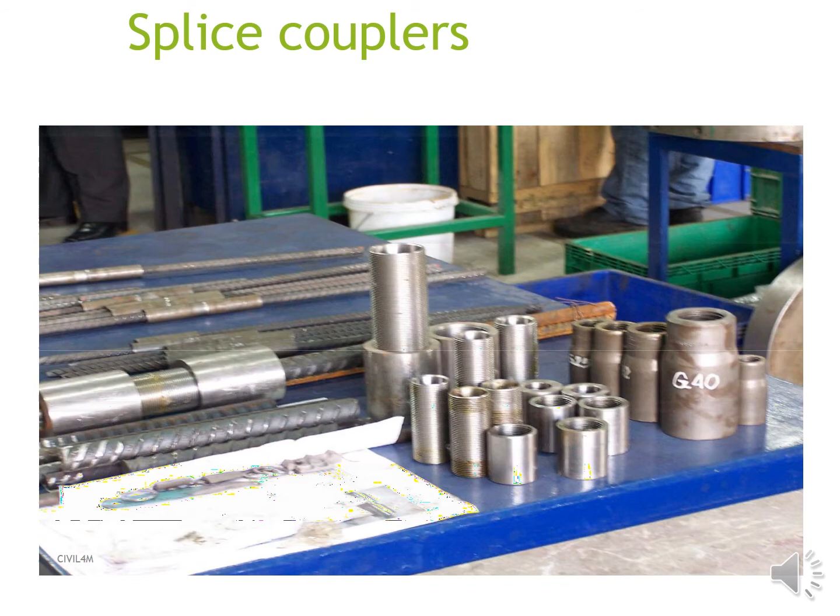Splice couplers. This is the splice coupler generally used for a higher diameter of bars.

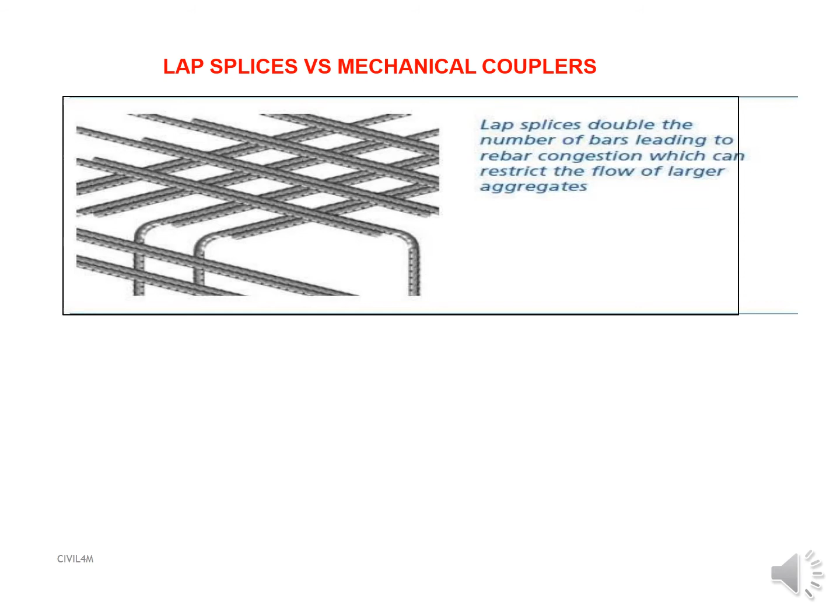Lap splices versus mechanical couplers. Lap splices double the number of bars, leading to rebar congestion, which can restrict the flow of larger aggregates. This is what I mean by lap splicers. Mechanical couplers reduce rebar congestion and improve concrete consolidation. So when I put a coupler over here, the number of bars will get reduced, giving more space for the aggregate.

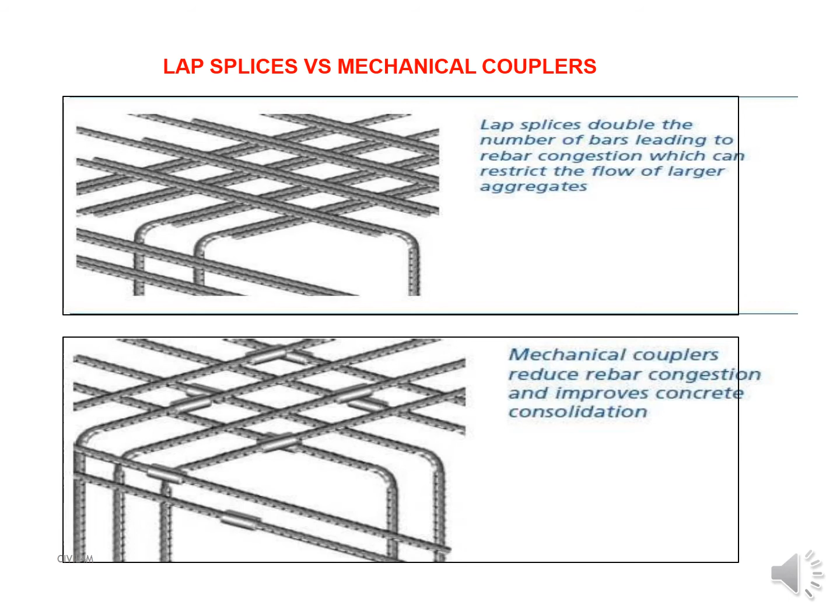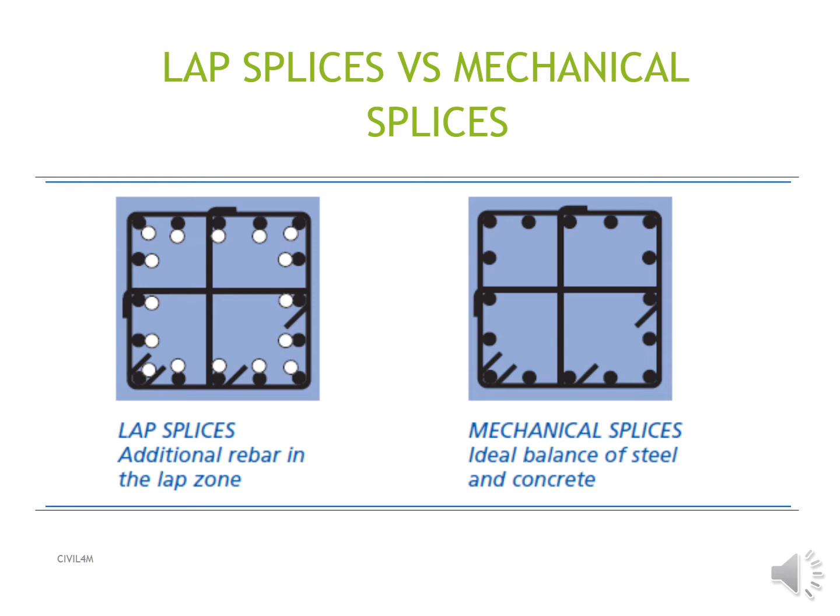Lap splices versus mechanical splices. Lap splicers have additional rebar in the lap zone, as you can see in these images. When you use mechanical splicers, there is an ideal balance of steel and concrete which reduces congestion at the joint.

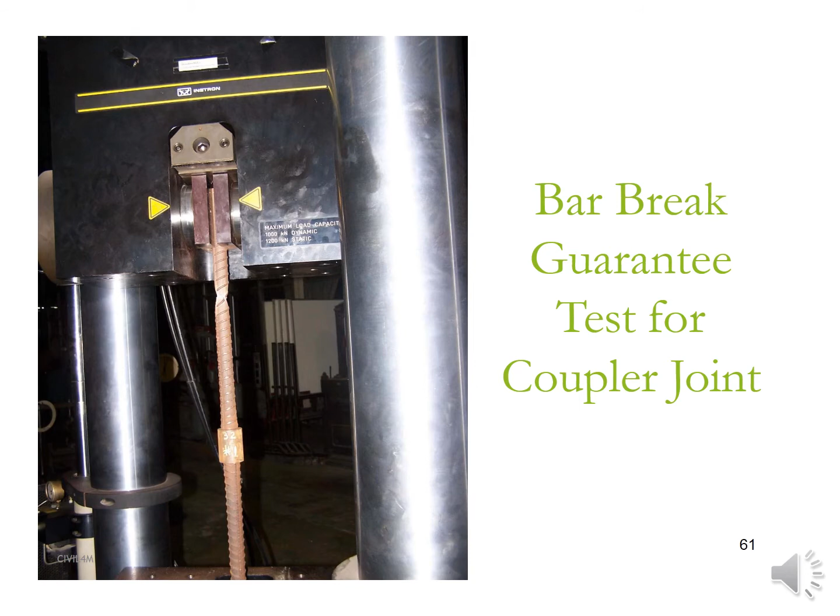Bar break guarantee test for a coupler joint. This is the methodology which you can see in a laboratory, how to do the bar break methodology of the joint.

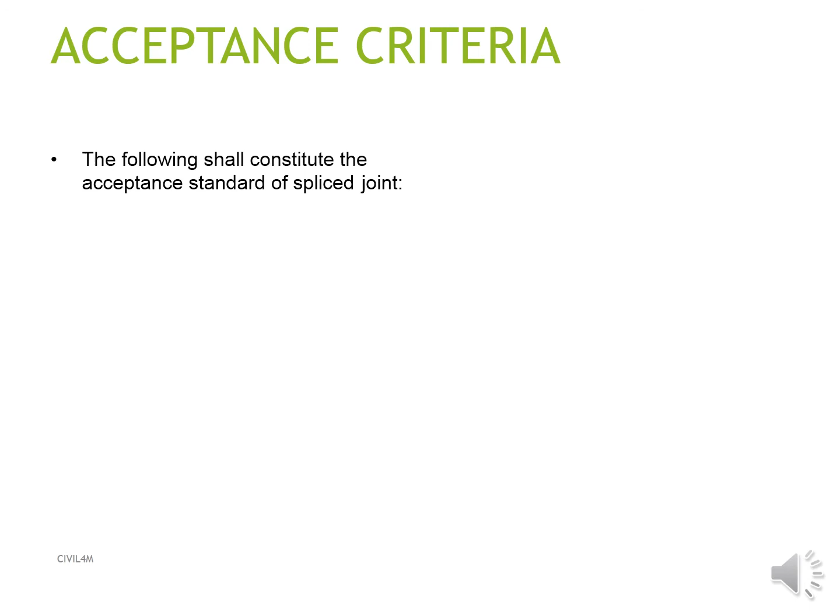Acceptance criteria. The following shall constitute the acceptance standard of the splice joint. The tensile strength of the splice joint shall be more than the rebars of Fe415. The spliced Bartech coupler joint should not fail in tension.

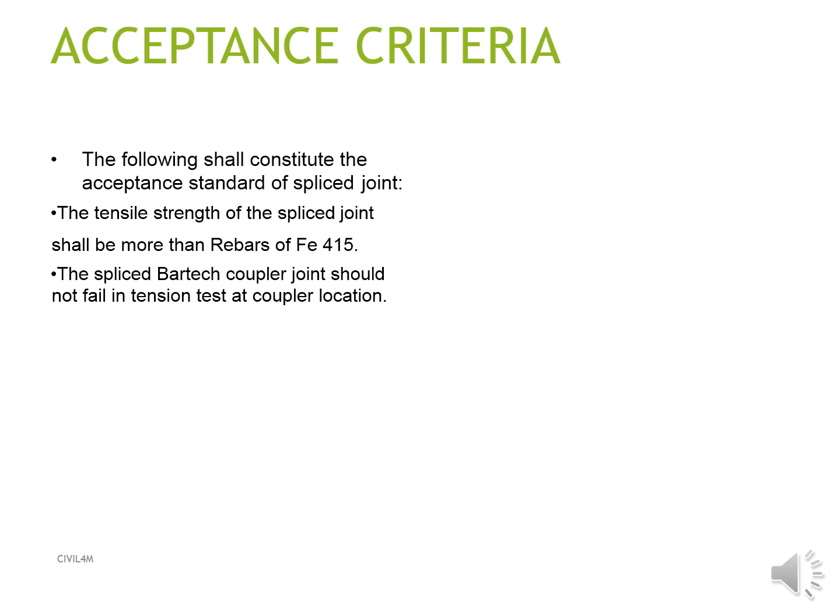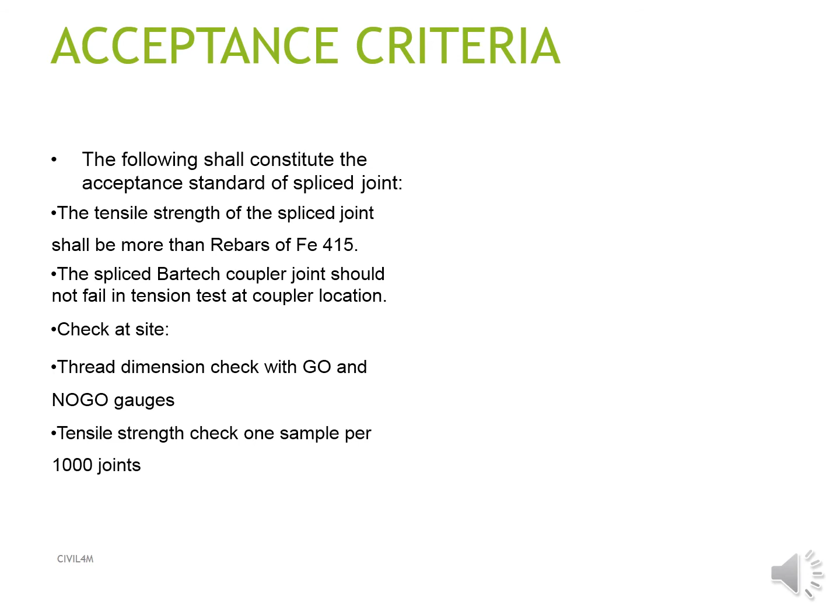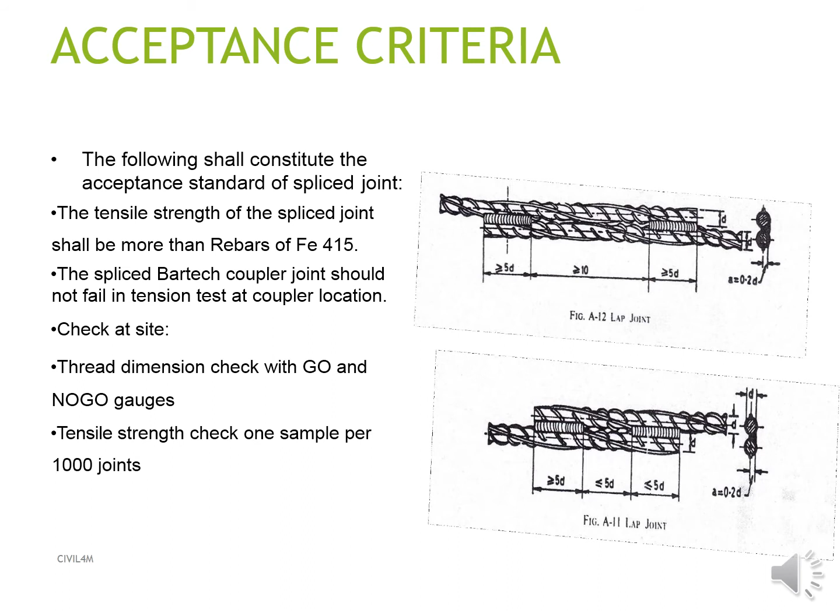Welding of reinforcement. Footing reinforcement. Check foundation rebars have 90 degree bend upwards at foundation ends as per the drawings. Check the bottom column bars bent minimum 300 mm or 24 dia, whichever is more, as per drawing. Check column main bars in plumb tied by stirrups inside the footing, at the rate of 8 dia at 300 center to center, minimum 3 numbers as per drawing.

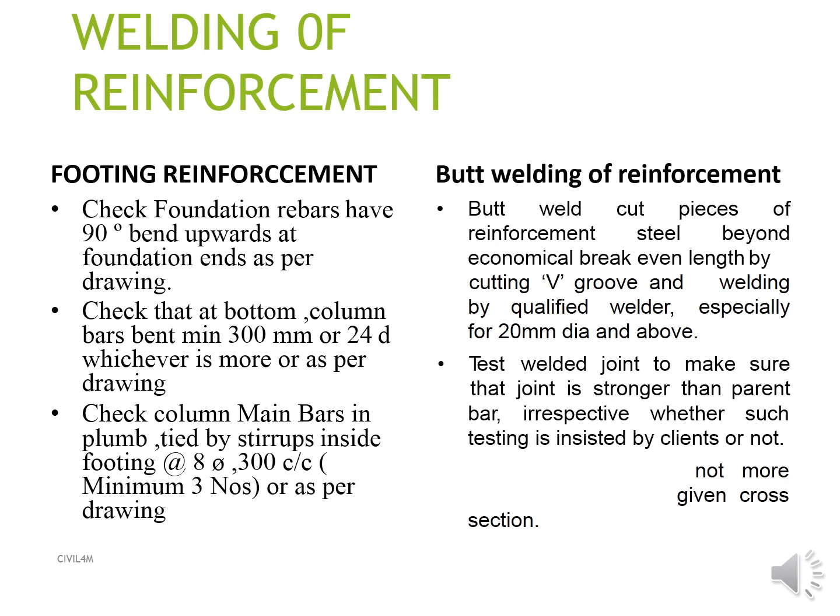Butt welding of reinforcement. Butt weld cut pieces of reinforcement steel beyond economical break-even length by cutting a V groove and welding with a qualified welder, especially for 20 mm dia and above. Test welded joints to ensure the joint is stronger than the parent bar, irrespective of whether such testing is insisted upon by clients or not. Use butt weld bars not more than 20% in a given cross section.

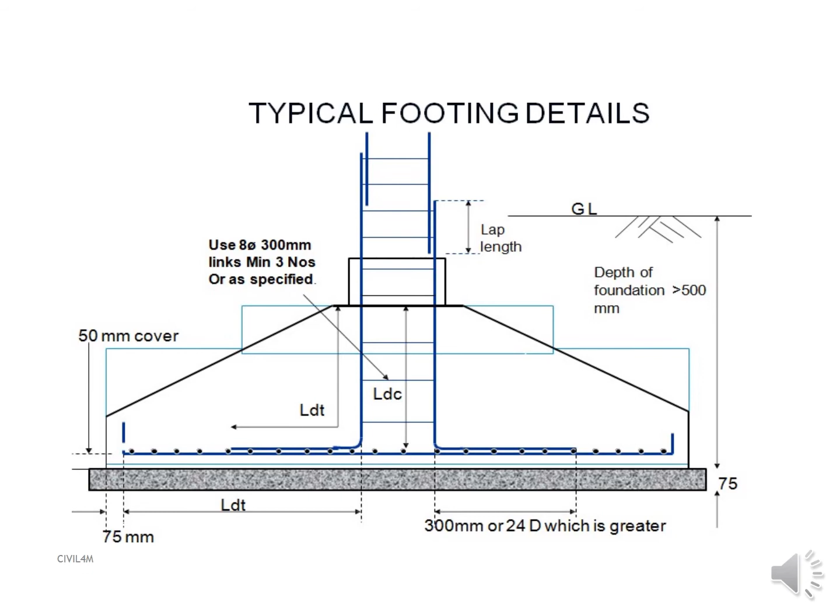This is the typical footing detail. The length of the bent bars will be 300 mm or 24 dia, whichever is greater. There is a 50 mm cover from the PCC to the reinforcement. Depth of foundation greater than 500 mm - this is the area you have to check as the lap length. Use minimum 8 dia, 3 numbers for a link as specified by the drawing. The PCC thickness should be minimum 75 mm.

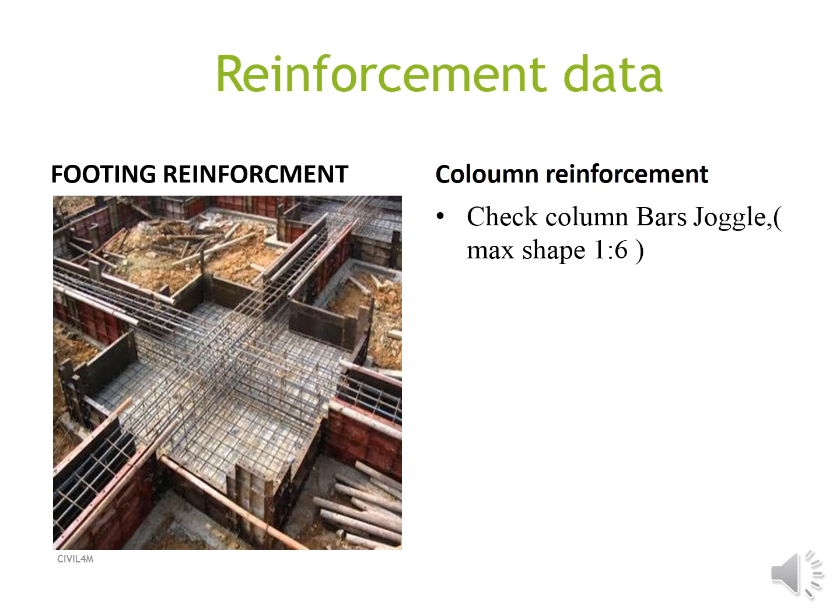Column reinforcement. Check column bars joggle, maximum slope 1:6. Column offset less than 75 mm on one or two sides. Main bars offset bent - if cranking is not within the beam, provide 3 number ties at 8 dia center, that is 2 extra plus 1 regular at the crank point.

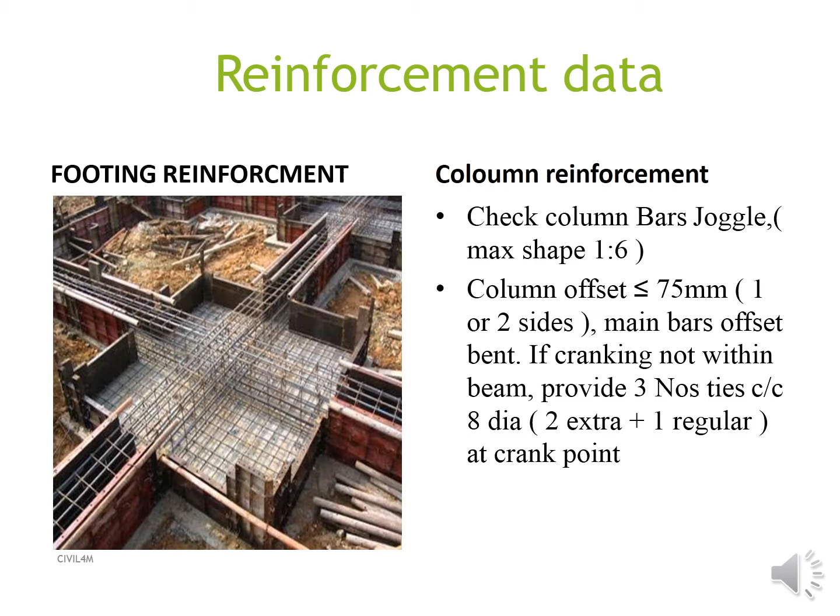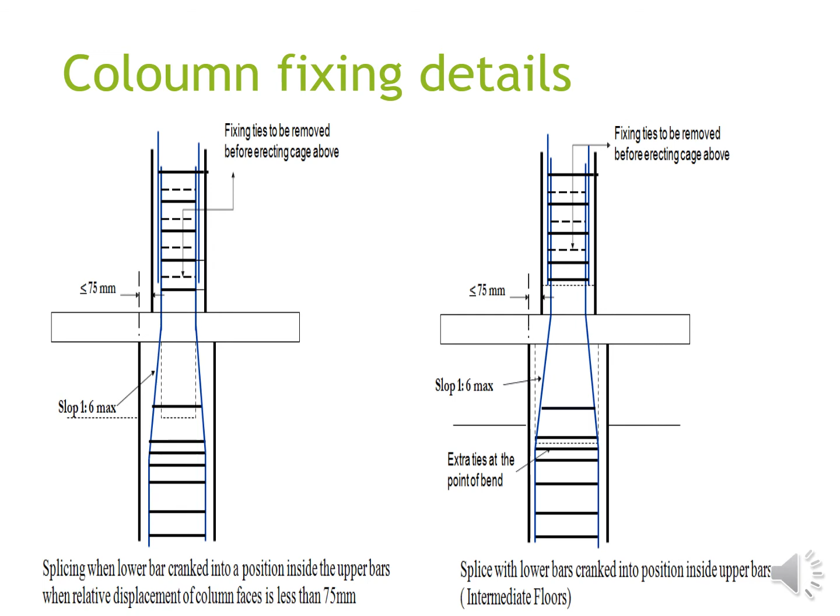Splicing when the lower bar is cranked in position inside the upper bar, relative displacement of column faces should be less than 75 mm. Splice with lower bars cranked into position inside upper bars, intermediate floors - you can see extra ties at the point of bend. The slope you make should be 1:6 maximum, and the cover should be 75 mm maximum. Fixing ties to be removed before erecting the cage above.

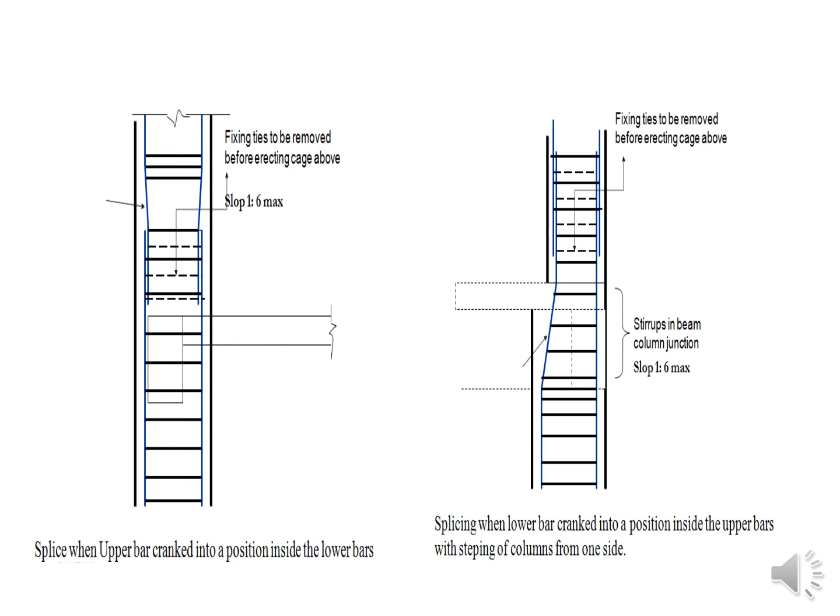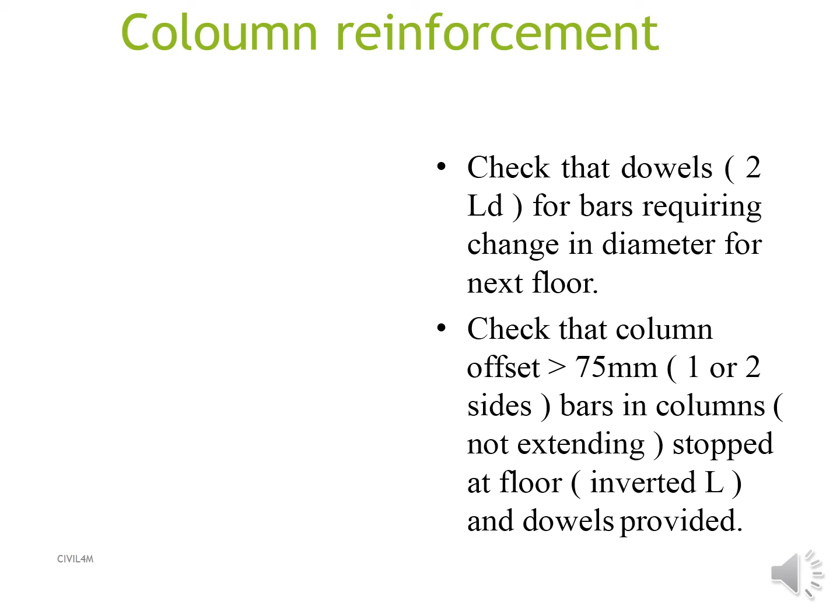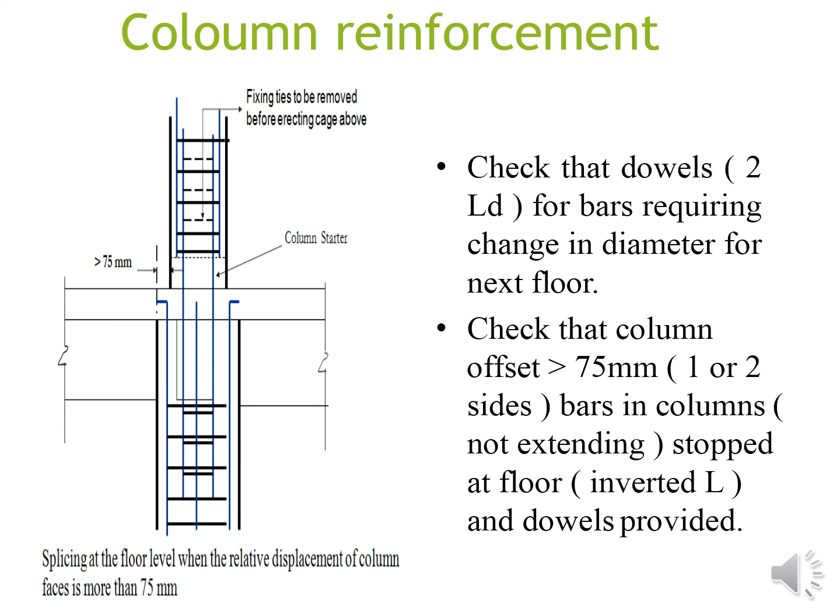Column reinforcement. Check the dowels, 2 Ld for bars requiring change in diameter for the next floor. Check that column offset is greater than 75 mm on one or two sides. Bars in columns not extending are stopped at floor, inverted L and dowels are provided. Here, fixing ties, 75 mm cover - this is a column starter. Now you understand how the column reinforcement has to be.

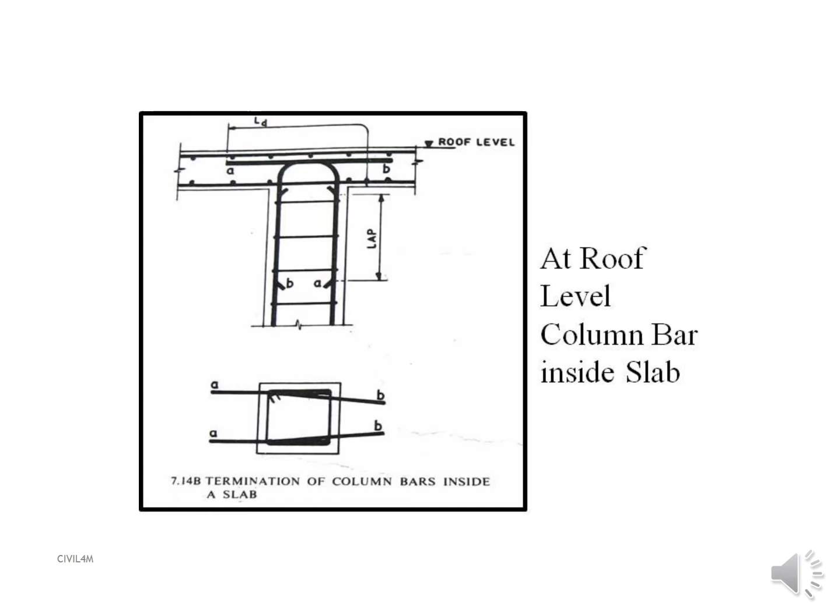At roof level, column bar inside a slab - whenever going to roof level, bend the column bars like this. Termination of the column bar inside the slab. These bars go and bend here, these vertical bars go and bend here. This is the lap length whenever you say it.

Stirrups, the things to be avoided: lap length of less than 8 dia. This is not acceptable at all.

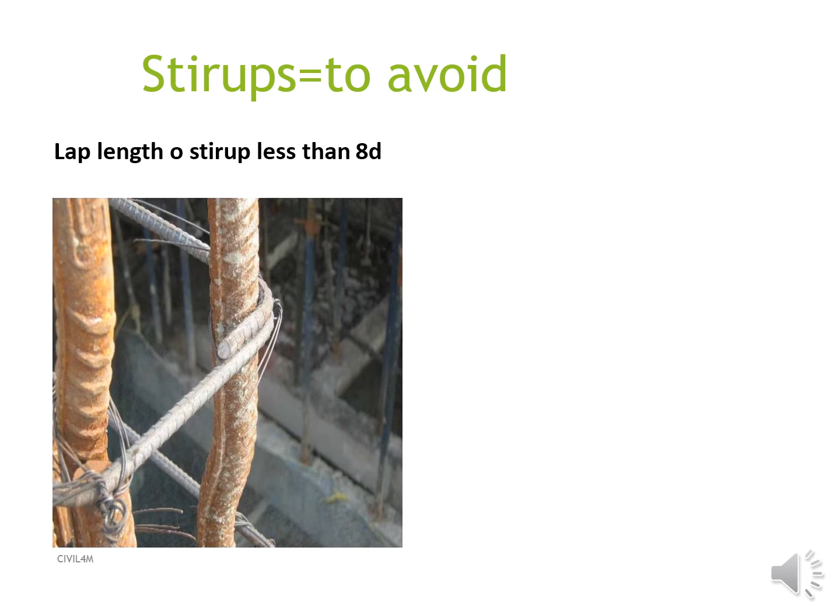Loose column links, these two are not acceptable. These column links have to be tied properly.

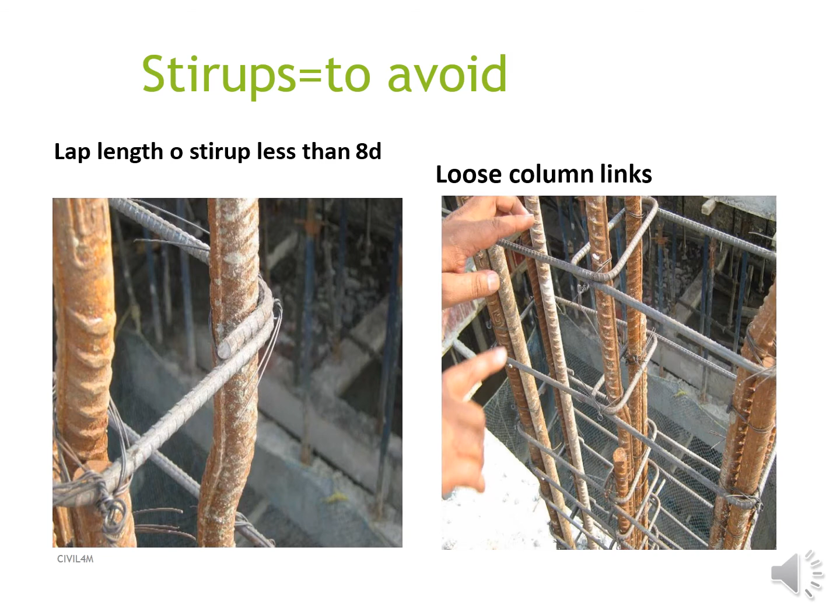Not to do: beam rebars not through the columns. Here you can see the beam rebar is not inside the column, it is protruding outside. These rebars have to go inside the columns.

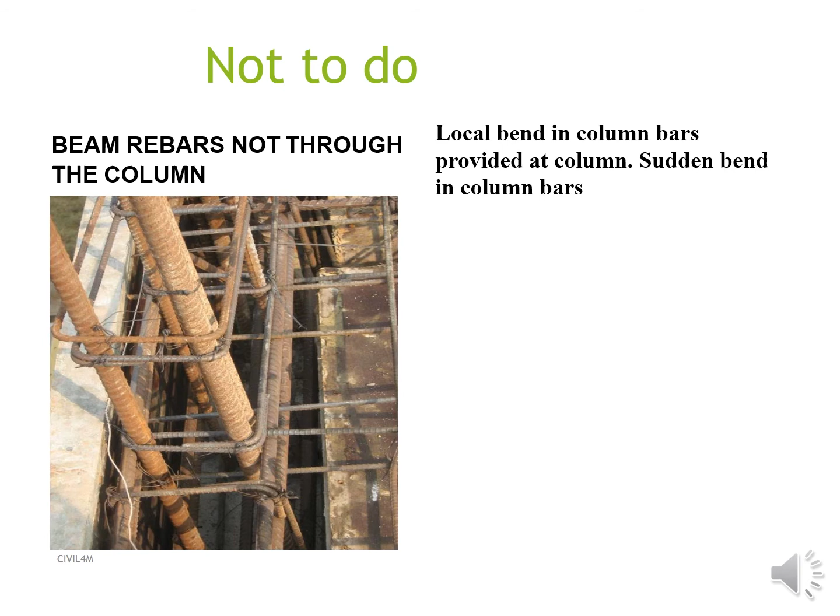Local bend in column bars, sudden bend in column bars provided. See, this is not at all acceptable. This is a shabby job, please do not do such a job.

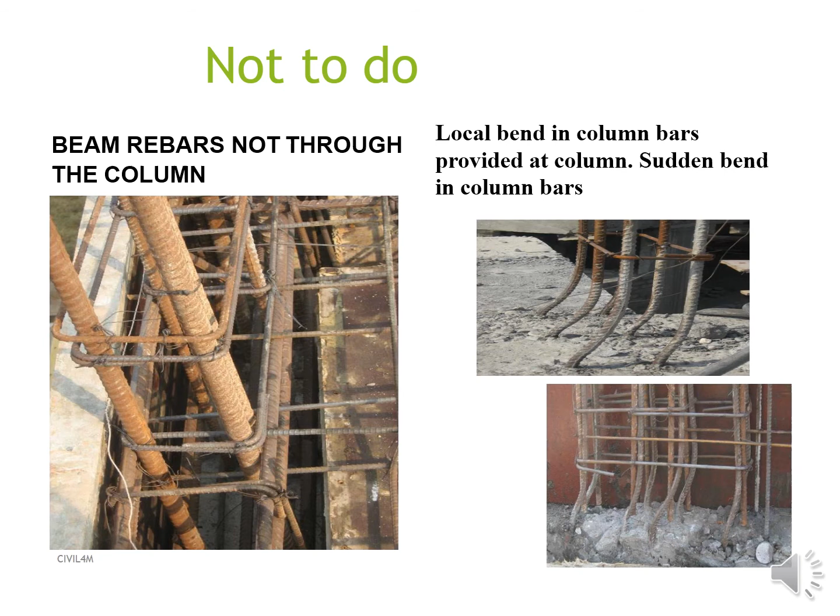Column reinforcement: check spacing of stirrups, diameter, shape as per drawing. End anchorage 8 dia for 90 degree and 6 dia for 135 degree. For heavy columns fabricated in parts, extra 12 dia open ties at double spacing. Check column bars projecting minimum 50 LD above slab as per drawing with minimum 2 to 3 fixing ties.

Temporary stirrups before casting the slab. Ties removed for erecting next.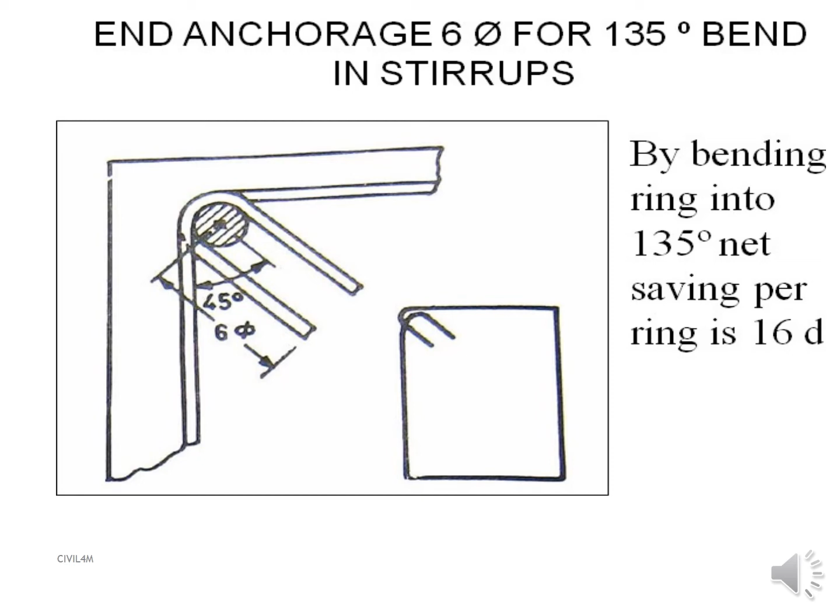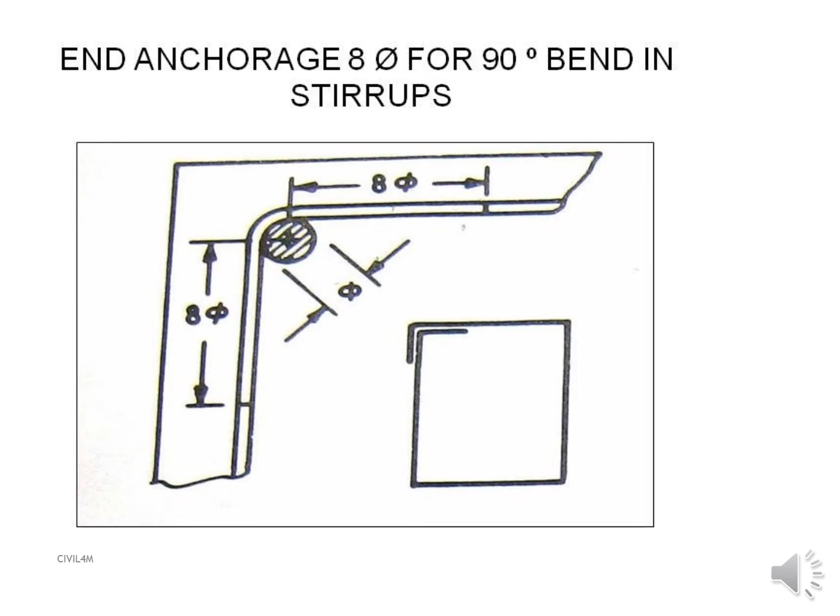End anchorage dia for 90 degree bend in stirrups. Whenever you are bending a 90 degree, this bend length has to go minimum 8 dia. This means from here to here 8 dia, from here to here 8 dia of the bar.

Slab beam reinforcement: check lap length steel in beams. Slab is 30 dia as per drawing. See this lap length, the 40 dia. Reinforcement bars, lap length is 40 dia.

Rebars with different diameters, provide the lap length in respect to the lower dia of the bar. If this is the lower dia of the bar, the lap length is to be based on this, not on this.

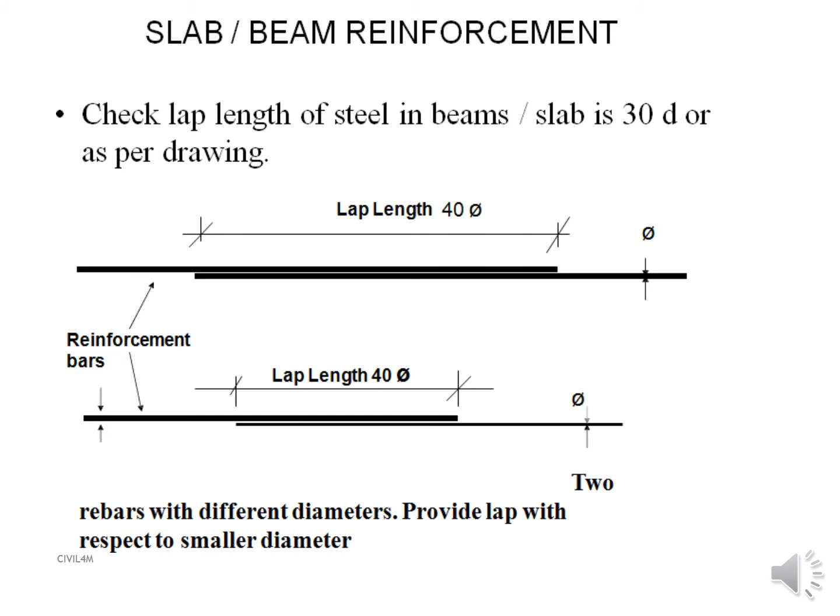Stirrup hanger bars stop short of a column face. Primary beam which has been going - bottom bars stop short of a column face. This is a secondary beam. Top bars, primary bars placed above the secondary beam.

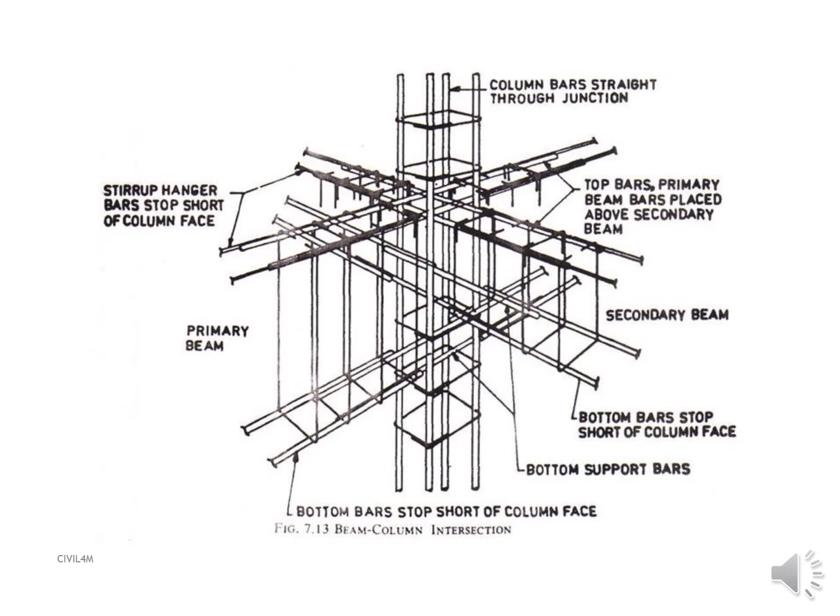Column bars straight through the junction. This will give you images of how you can understand the main beam and the supplementary beam, and the column going in between the two beams.

See, stirrups, beams, column junction. Whenever there is a beam stirrup in the column junction, how it is to be fixed has been very clearly mentioned. Whenever you are reducing the column bars, slope should be 1:6 maximum. 75 mm is a starter.

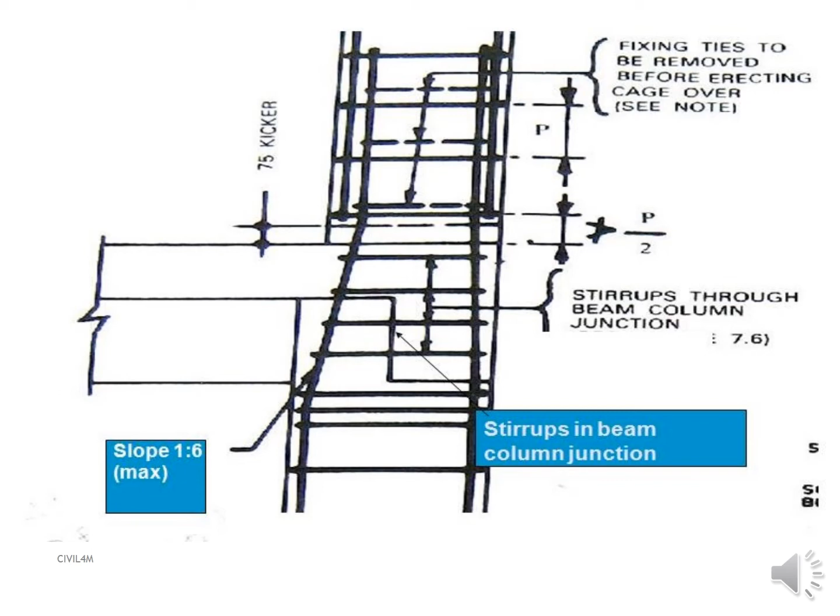Stirrups through the beam column junction. See, you have to provide a beam column junction as stirrups. Fixing ties - this is the fixing ties to be removed before erecting the cage over next.

Slab beam reinforcement and conduit laying. Check that beam bars are modified for electrical downtake conduits with adequate cover to the conduits. Between two electrical conduits, 25 mm gap shall be given.

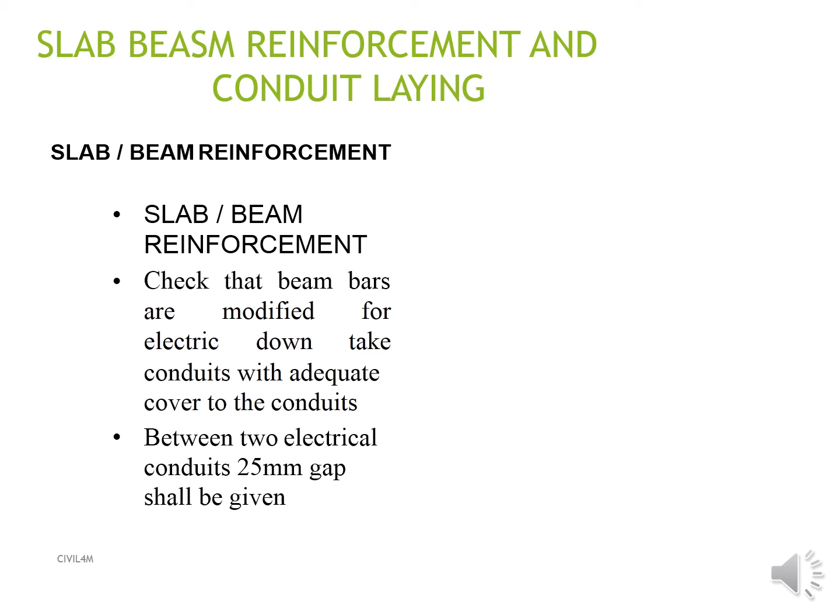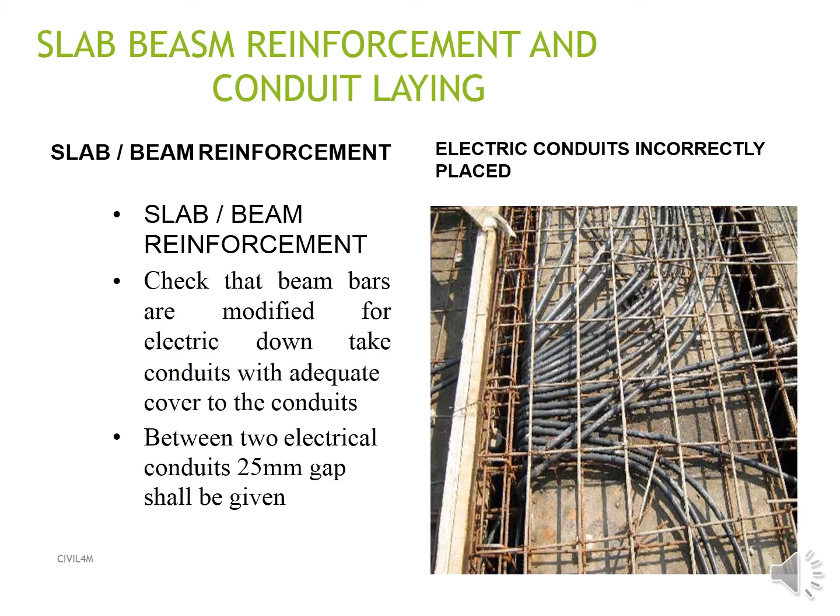Electric conduits incorrectly placed. This is not the way electrical conduit has to be fixed, because there is no gap between these two electrical conduits, concreting will not pass through, which will create honeycombs and everything. Ensure that between the two conduits you have a minimum 25 mm space so that the concreting can pass through.

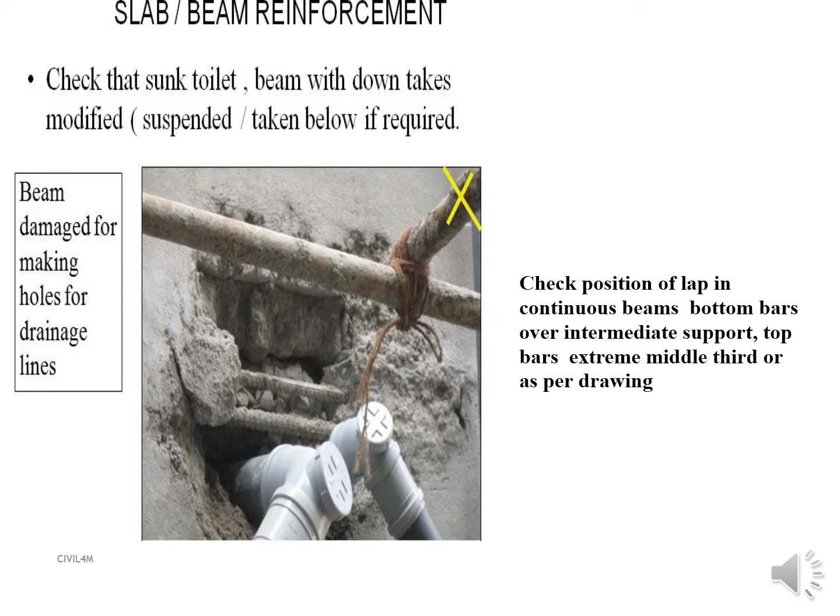Check position of lap in continuous beams. Bottom bar over intermediate support, top bars extreme middle third as per drawing.

Position of laps in continuous beams. Top reinforcement lap at extreme middle third as shown here. Bottom reinforcement lap at center of the intermediate support.

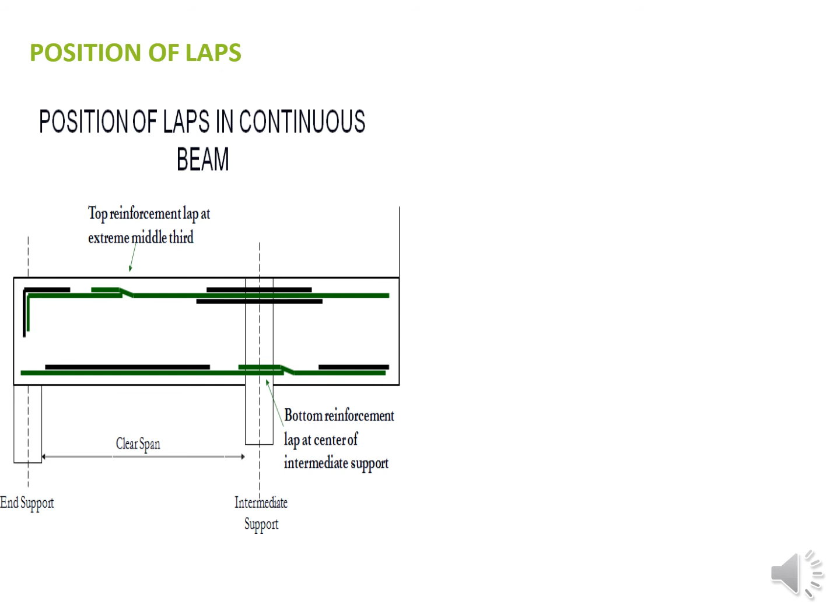This is what I mean to say: this is a clear span, this is what we call an intermediate support, and this is the end support.

Slab beam reinforcement: main steel secondary beams resting on the main bars of primary beams. Secondary beam main bars resting on primary beam main bars. You can see here secondary beam bars are resting on the main beam, it has been tied at the site.

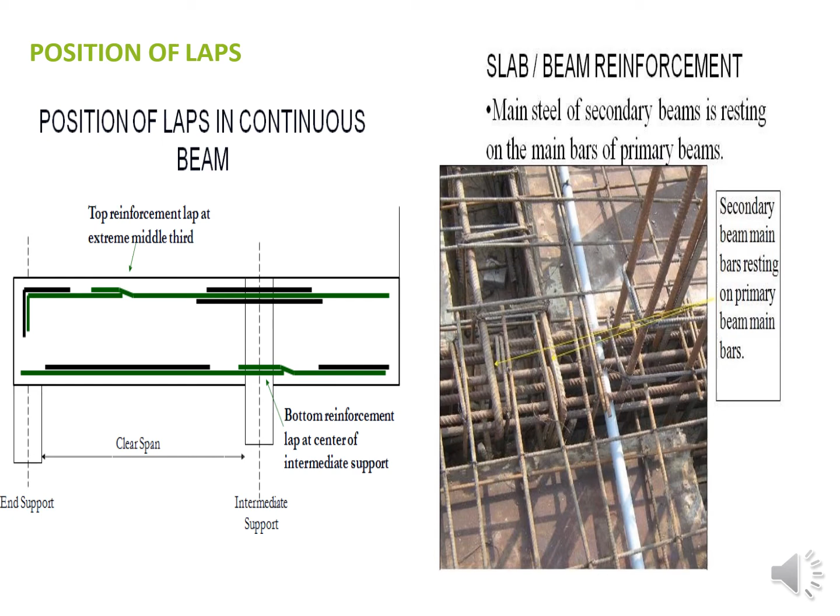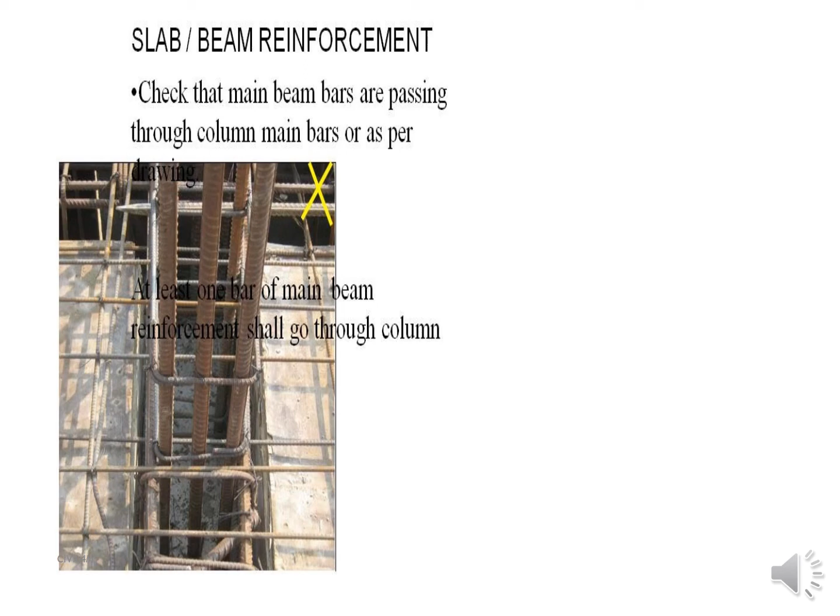Slab: check that main beam bars pass through the column main bar as per the drawing. Here you can see the beam bars have not passed through the column, which is incorrect. These main bars have to go through inside the column.

Slab beam reinforcement: check minimum horizontal spacing between the bars, maximum diameter of the bar, that is 5 mm more than the maximum size of the aggregate, so that the concreting can pass through properly.

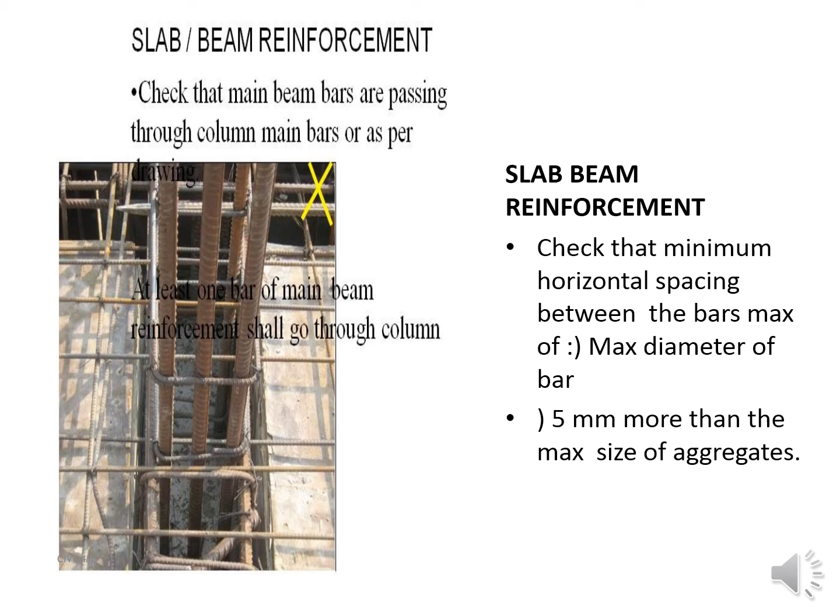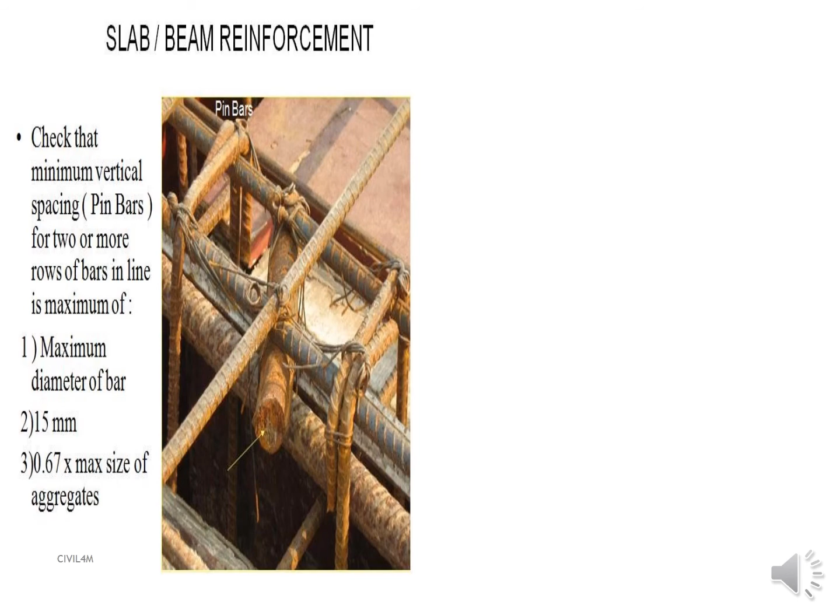Check that minimum vertical spacing for pin bars, for 2 or more rows of bars in line, is maximum of: maximum diameter of the bar, or 15mm, or 0.67 times maximum size of aggregate. See how the pin has been provided here so that these bars do not touch each other, allowing concreting to pass through. This is what I call the pin bars.

Check spacing of the stirrups, diameter and shape as per drawing. End anchorage is 8d for a 90-degree bend and 6d for a 135-degree bend. This is what I call a 135-degree bend, and this is a 90-degree bend. Here you can see 8 dia and this is 6 dia.

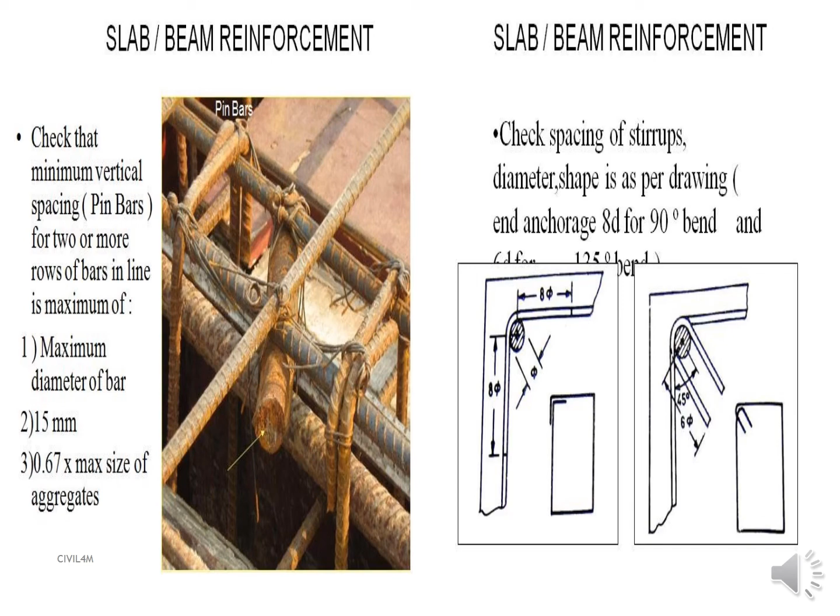Chairs for slabs shall be designed to take manual and mechanical loads during slab casting. A chair is meant to maintain spacing between the two meshes of the slab, top and bottom. The chair shall not be touching the shuttering.

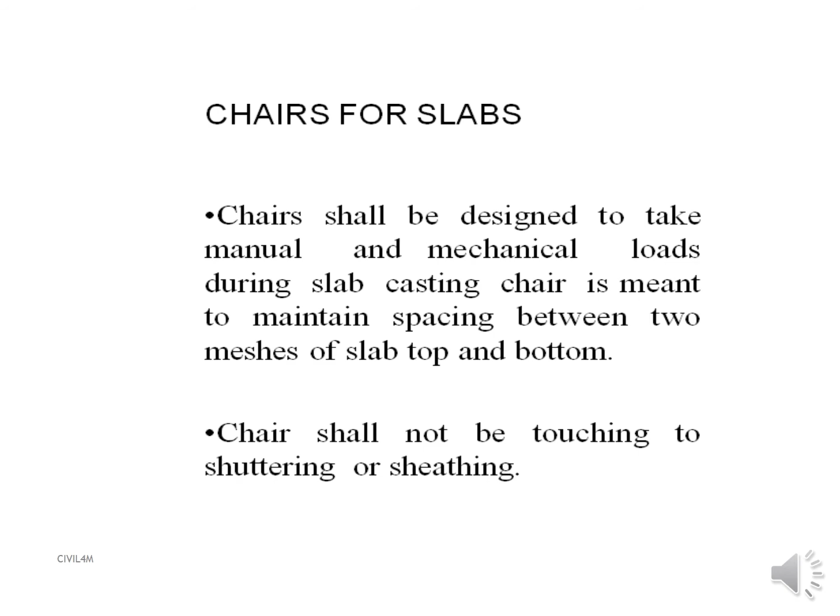This is wrong practice for placing chairs on shuttering. Never ever do like this.

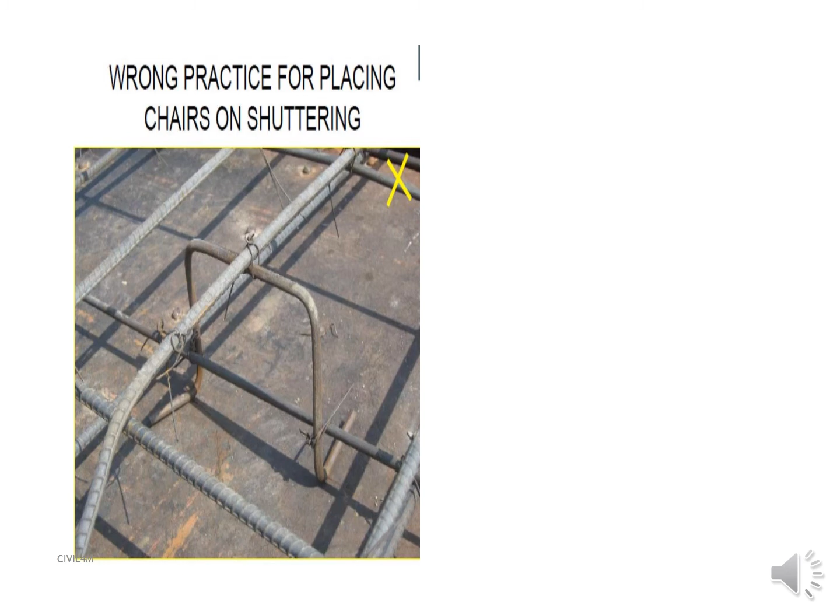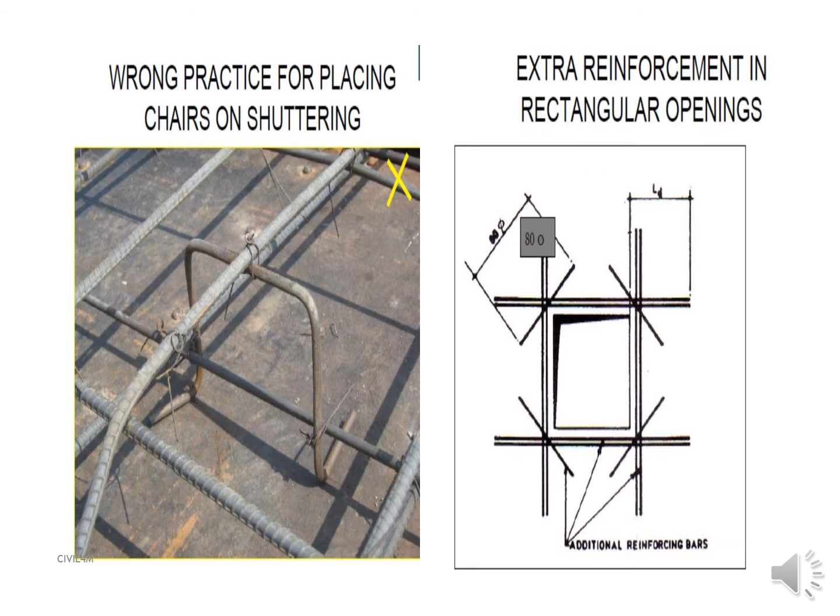Extra reinforcement has to be placed near the rectangular opening. You can see extra bars have been provided around the rectangular opening so that these openings will not crack in shear.

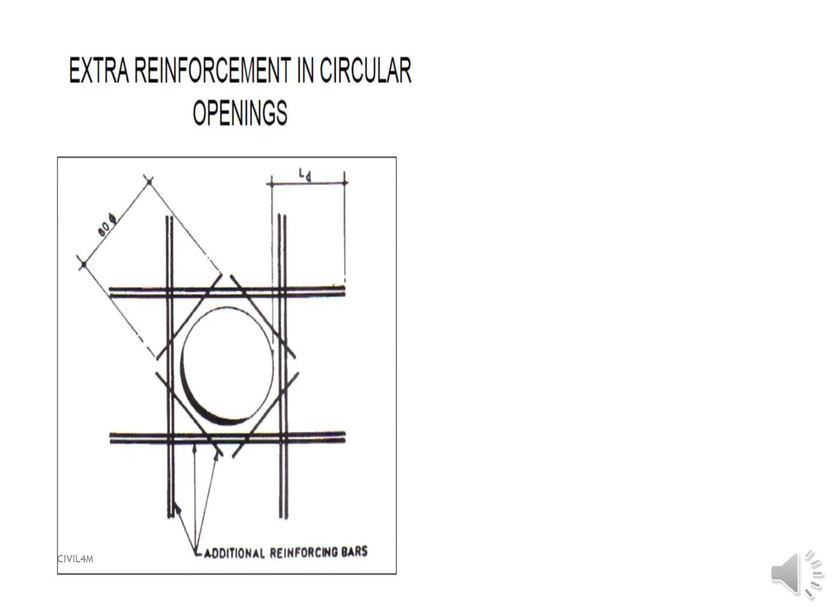Extra reinforcement for circular opening: again in circular openings you have to put 80 dia of the bar, or as per LD, to prevent a shear crack.

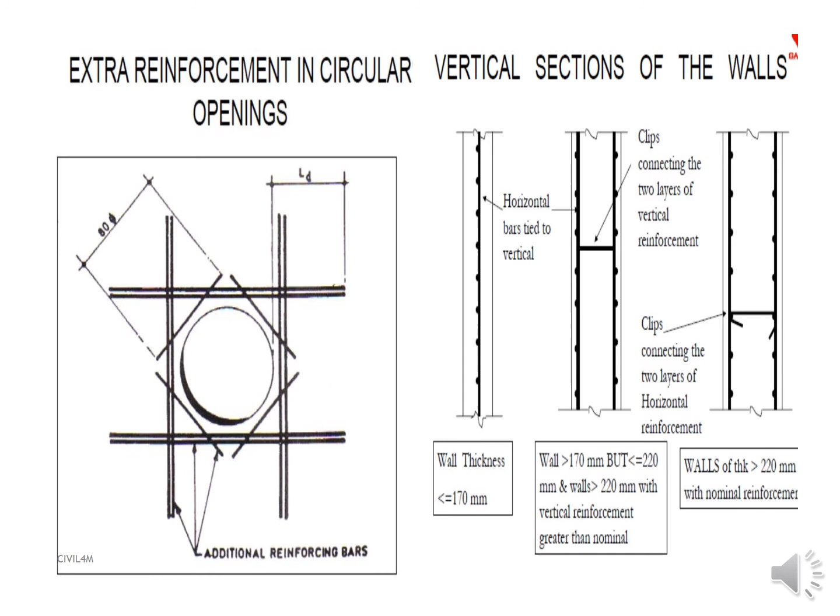Vertical section of the walls. Horizontal bars are tied to vertical bars. Clips connect the two layers of vertical reinforcement, like this. Wall thickness is up to 170 mm.

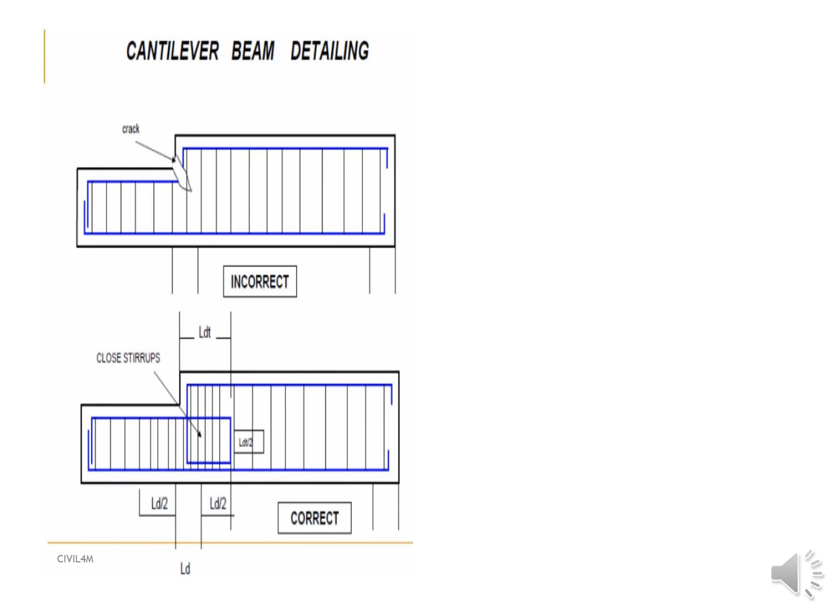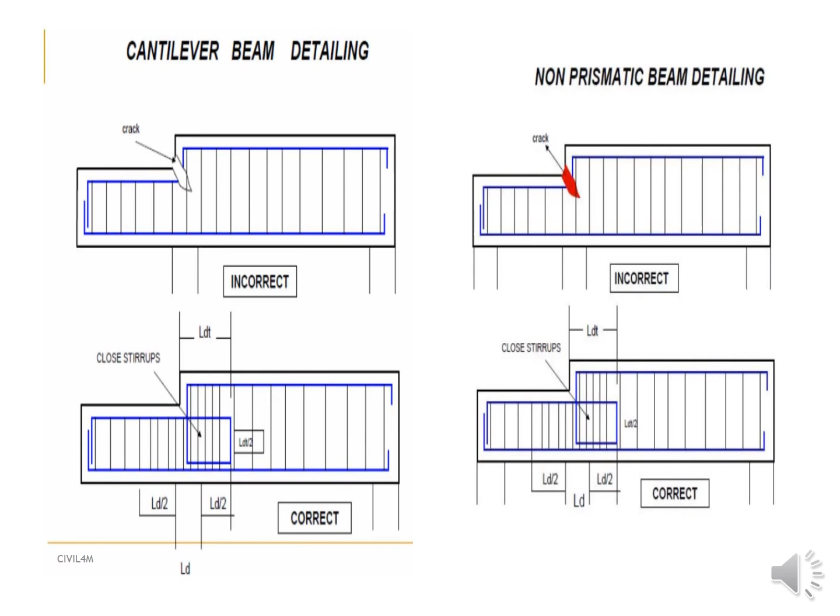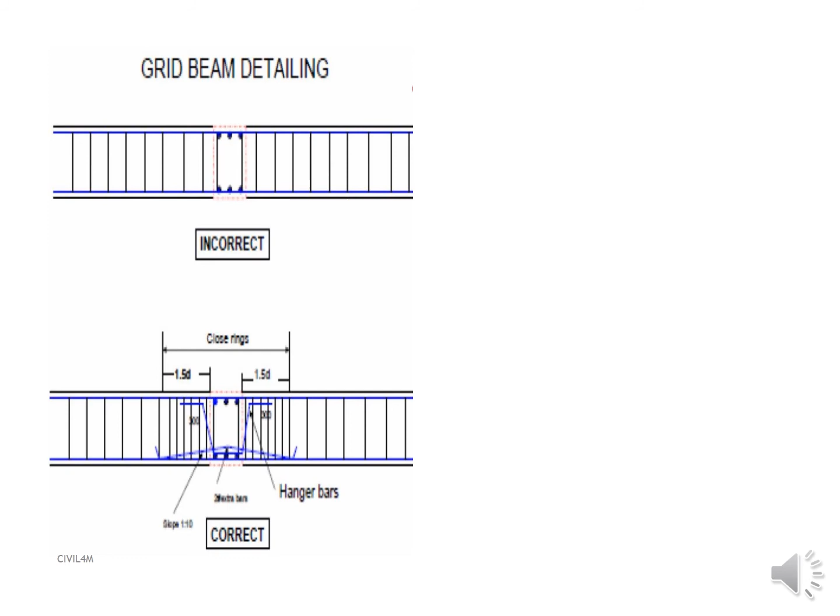Grid beam detailing: this is incorrect wherever it has been cut at the end, whereas at the close rings it should be 1.5 dia, and there should be closed stirrups and hanger bars.

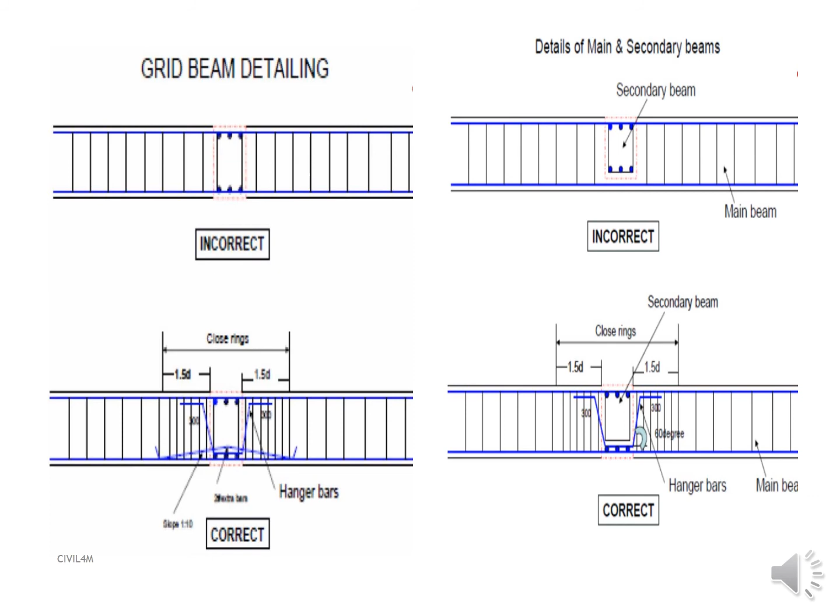Grid beam detailing: this is incorrect wherever you are cutting these bars. See the correct methodology - the main bars have to go through the full depth, bend bars are like this, and whenever you add extra bars it will be like this. These bottom bars have to go end to end. Check this.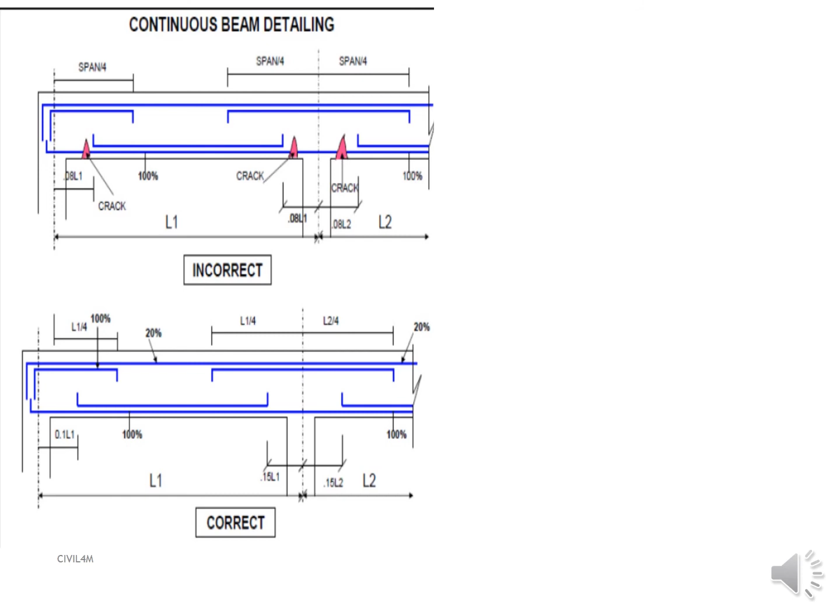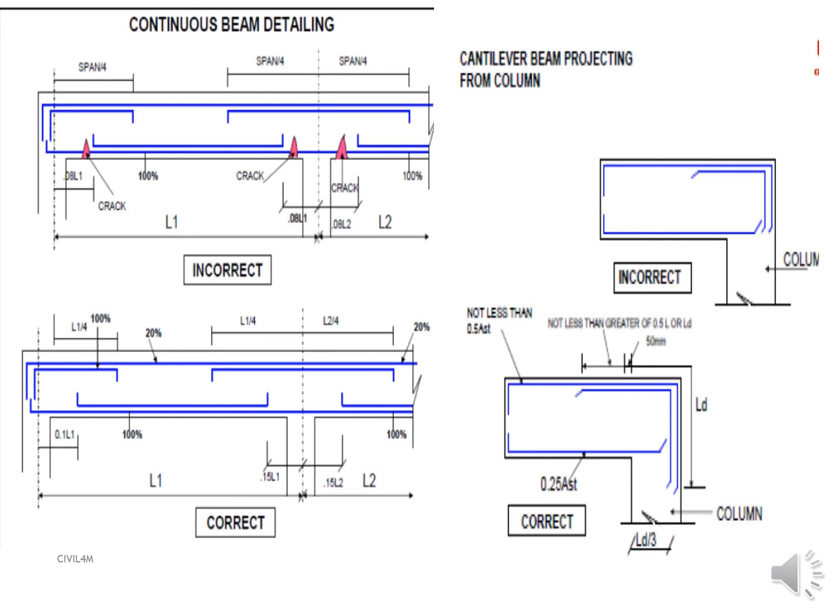Cantilever beam projecting from column: this is incorrect wherein you cut the reinforcement here itself - not acceptable. It has to come down further, as per LD. This is the correct methodology of detailing a cantilever reinforcement.

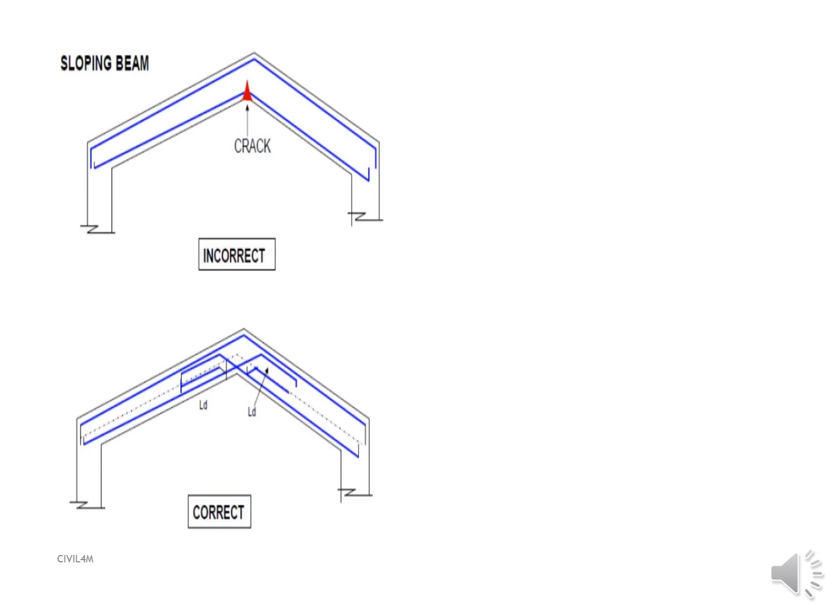Sloping beam: this is incorrect. The correct methodology is that this bar has to go up and bend and cut here. These bars go and get cut up here, which causes a disconnectivity - this is totally incorrect and not acceptable.

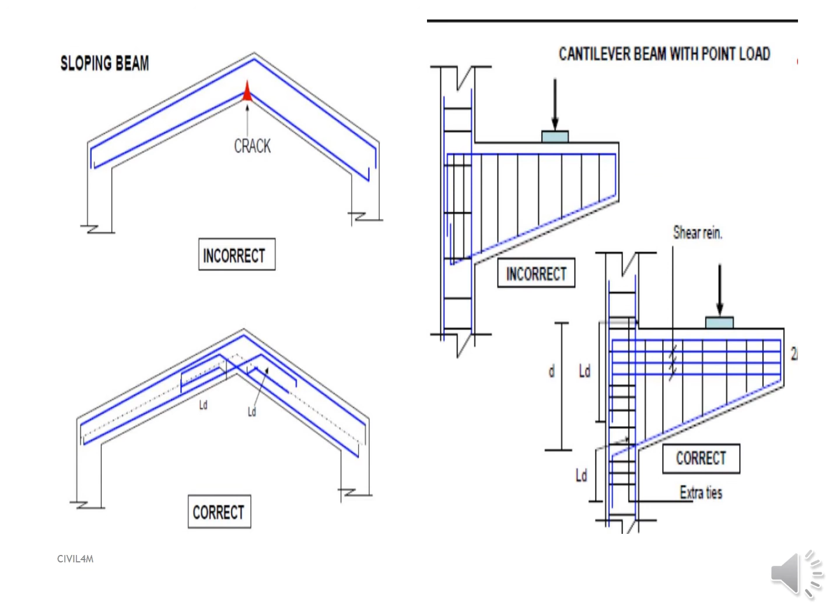Cantilever beam with a point load: this is incorrect here, you can see how the number of bars has been cut down. To make it correct, extra ties have been provided here.

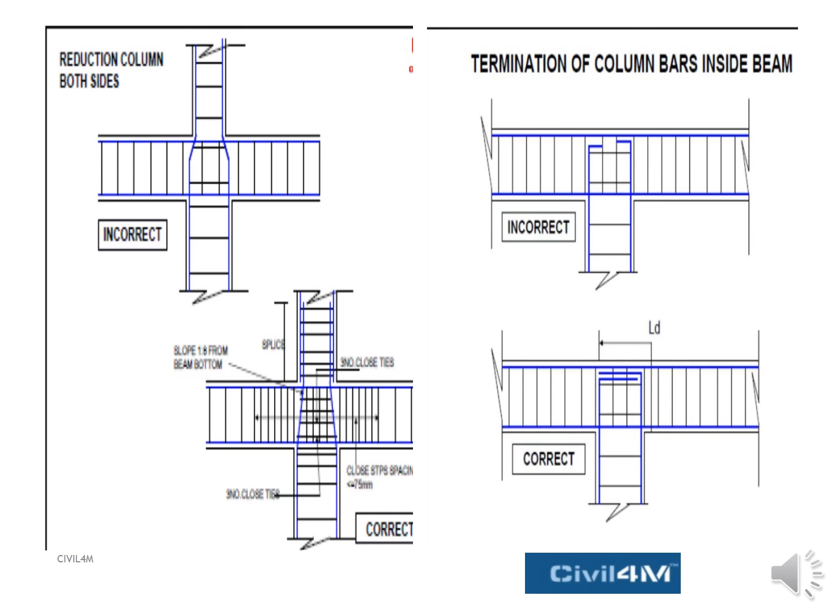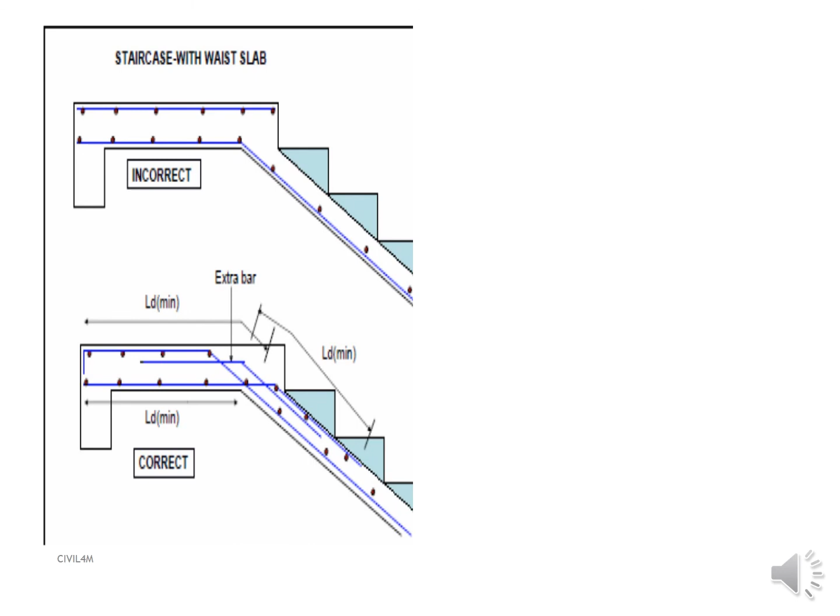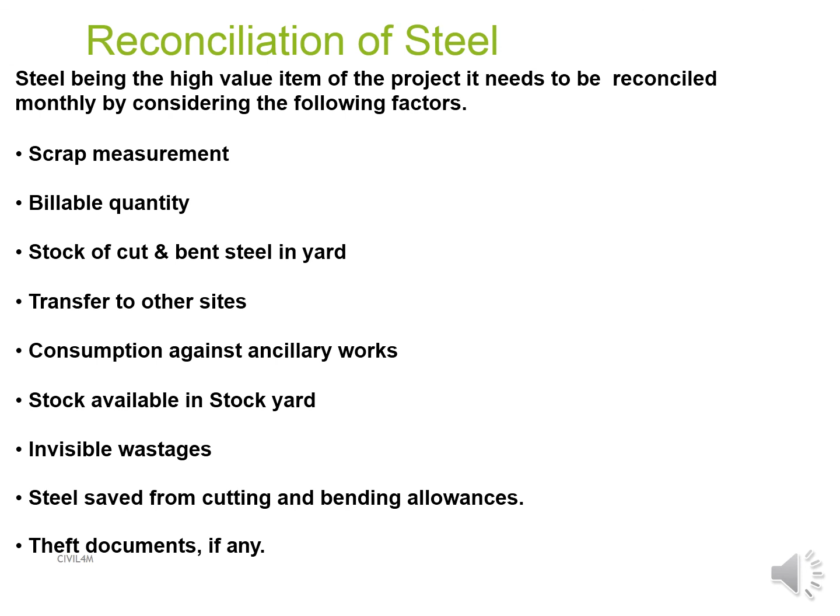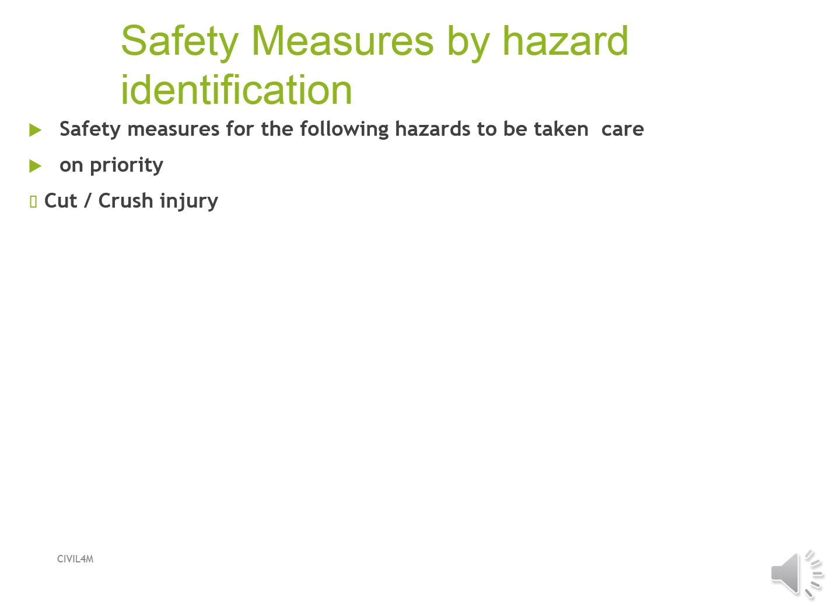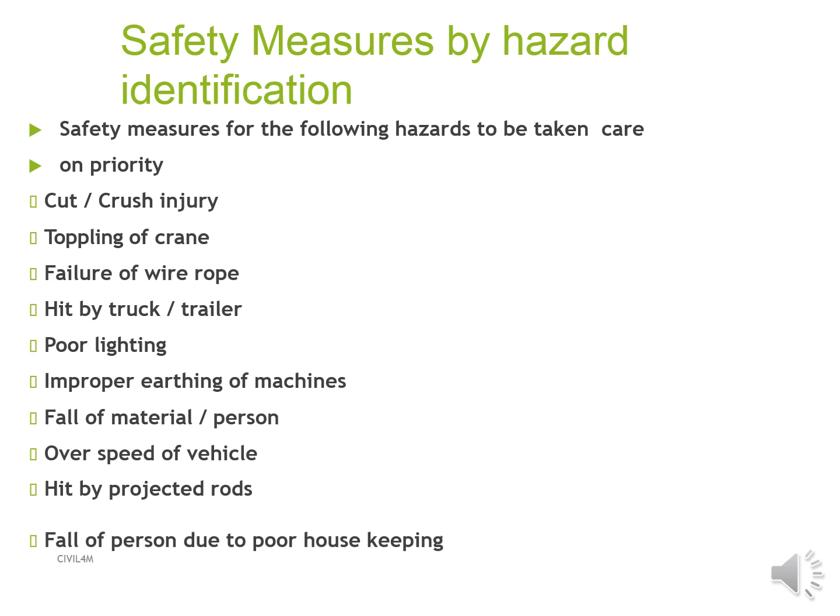Safety measures by hazard identification. Safety measures for the following hazards must be taken care of on priority: cut and crush injury, toppling of a crane, failure of a wire rope, hit by truck or trailer, poor lighting, improper earthing of machineries, fall of material onto a person, overspeed of vehicles, hit by a projected rod, and fall of a person due to improper housekeeping.